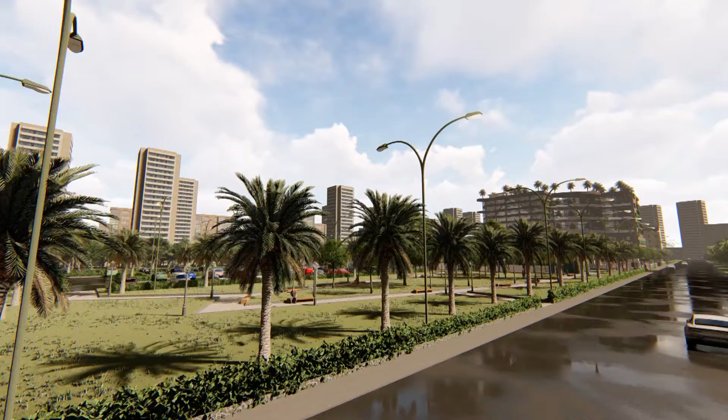My name is John Mikey A. Villanueva. I'm here to show to you my thesis presentation entitled Hope, a proposed Quezon City Cancer Medical Institute: Holistic approach through health and wellness therapies. A tertiary level hospital specializing in cancer healthcare. A research focus of a psychosocial-spatial integration of a healing, collaborative, and learning environment of a cancer institute.

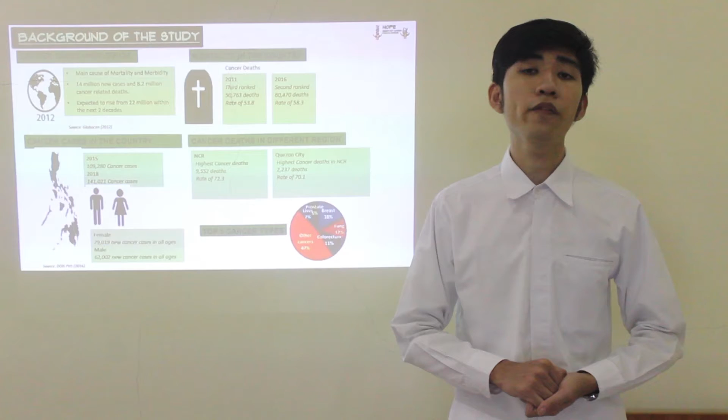Before we go on to the thesis proper, let's discuss the background of the study. Cancer cases worldwide are the main cause of mortality and morbidity, with a number of 14 million in 2012. In our country, cancer cases increased from 2015 to 2018 with a number of 141,021 cases. Female holds the highest number of cancer cases with 79,019, while for male it is 62,002. Moving to mortality, cancer death ranked third in 2011, increasing to second place with 60,470 deaths in 2016.

Cancer deaths in different regions: NCR hosts the highest cancer death among all cities and regions in the Philippines with a number of 9,552 deaths, and under NCR, Quezon City hosts the highest cancer death among all cities with a number of 2,237 deaths. Now for the top 5 cancer types.

Number 1 is breast, followed by lung. Third is colorectum. Fourth is liver. And the fifth one is prostate.

Next is the site of the project and its characteristics. The site is located along Barangay Pasong Putik, Novaliches, Quezon City, Metro Manila. It is an irregular lot with a total land area of 2.6 hectares, adjacent to 4 minor roads. The site is accessible via private and public vehicles such as buses, taxis, jeepneys, or even private cars.

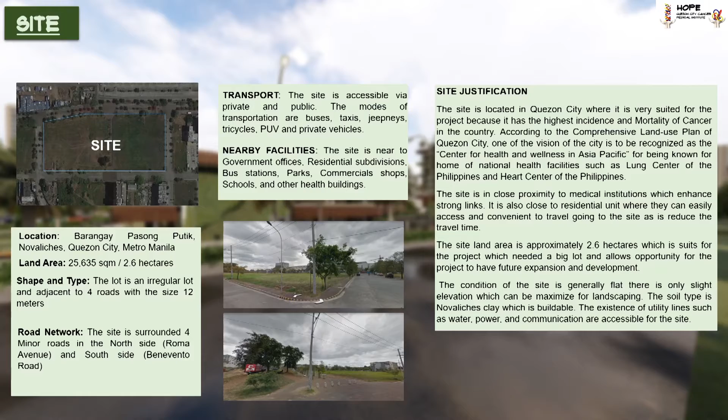The site is surrounded by businesses, residential subdivisions, parks, stations, commercial shops, and even schools. I therefore conclude that the site is very suited for this project since it's located in Quezon City, where it hosts the highest cancer cases and cancer deaths among all cities of the Philippines. It is also one of their main missions to be recognized as the Center for Health and Wellness in Asia Pacific.

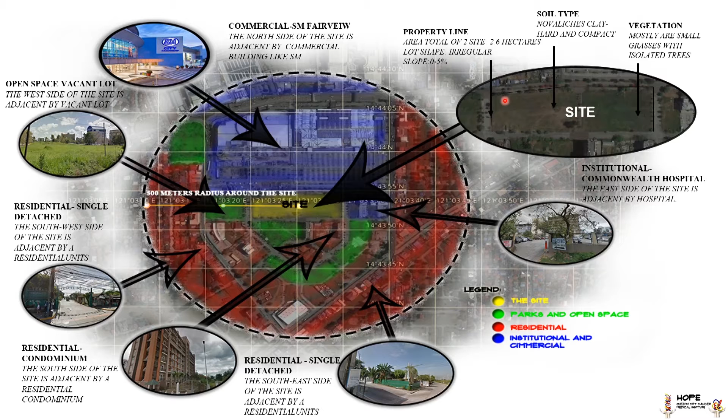The site's soil type is classified as Novaliches clay, which is hard and compact based on its characteristics. The vegetation of the site is composed of many small grasses and fewer trees, located beside the property line. The sloping of the site is 0 to 5% with the shape of an irregular lot.

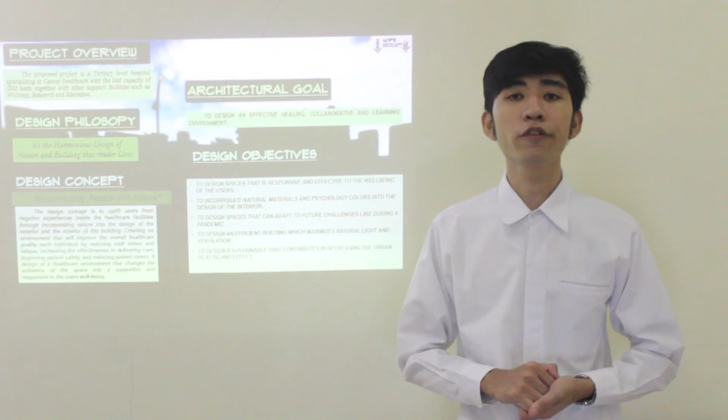Next will be the project overview and also the different ideas towards the design approach of the building. For the project overview, this project is a tertiary level hospital specializing in cancer healthcare with a total number of 200 beds capacity, supported with other facilities such as wellness, research, and education.

For the design philosophy, it's the harmonious design of nature and building that render lives. It means the combination of the building itself and nature will have to improve the quality of experience of the users inside the space.

Design concept: reconnecting people with nature. Knowing that healthcare and hospitals are considered one of the many environments that are stressful, this concept will assess and flip the users from negative experiences into a positive outcome through incorporating nature design throughout the exterior and interior of the building, creating an environment that will improve overall healthcare quality of each individual by reducing staff stress and fatigue, increasing effectiveness of delivering care, improving patient safety, and reducing patient stress—a design of space that will support and be responsive to the user's well-being.

For the architectural goal, it is to design an effective healing, collaborative, and learning environment. So for the design objectives: a design that is responsive and effective to the well-being of the users.

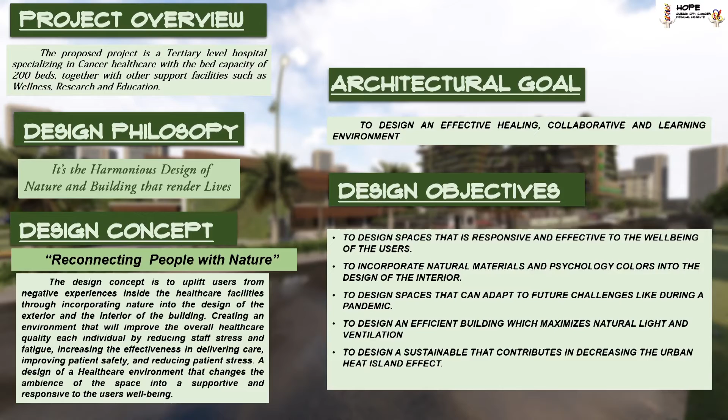Design consideration number one is the control circulation. A hospital is considered one of the most complex projects for having many different institutional and functional zoning.

Next is the safety and security. A design that can sustain such as typhoon, earthquakes, and fire, and also a provision of the Fire Code of the Philippines for having a safety and escape plan.

For accessibility, provision of BP 344, consideration of the accessibility law.

Next is the sustainability. A design that can decrease the heat island effect and can cleanse the air pollutant.

For the efficiency, a design that can maximize the use of daylighting and passive cooling that can decrease the consumption of energy. A design that can assess the current and future issues through incorporating flexible spaces that can adapt to future changes.

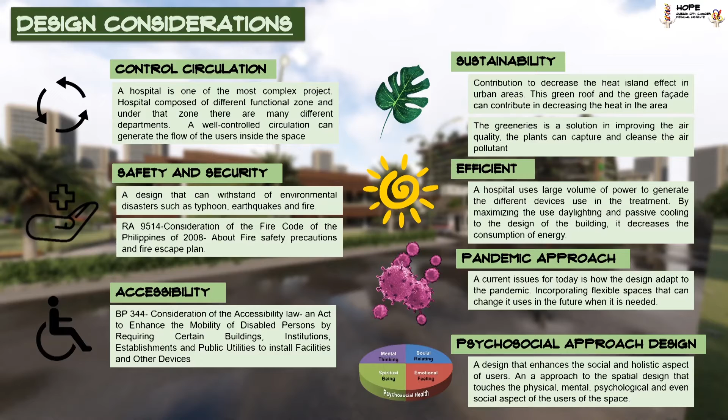A design of the space that targets and approaches the mental, social, spiritual, and emotional construct of each individual. A psychosocial spatial integration of a healing, collaborative, and learning environment of a cancer institute.

So what is psychosocial? It is the factors that influence the psychological and social construct of an individual person. Relating it to architecture, psychosocial-spatial is an approach to the design of spaces that supports and enhances their psychological and social well-being. So the diagram shows the four factors that affect the psychosocial.

So in the next slide, it shows the psychosocial design focus approach. Number one is the connection to nature. Having a water feature and a green feature for each floor will create an enhancement to the well-being of the users, as well as a home-like environment for the design of the interior, incorporating natural materials and the psychology of colors.

Next is the common spaces. Common spaces promote social life. It brings a sense of community and helping each other. These common spaces can also be used in future expansion or for other purposes.

Next is the aesthetic views coming from the exterior of the building. These green ledges show a good positive distraction to the user inside the interior.

Next is maximizing the use of natural light and fresh air, knowing that it is really helpful for the cancer patients and also for the staff to have enough natural light and fresh air to attain and enhance their well-being. Next is the control circulation, providing wood dividers and also the colors of the room for distinguishing the different functions of rooms.

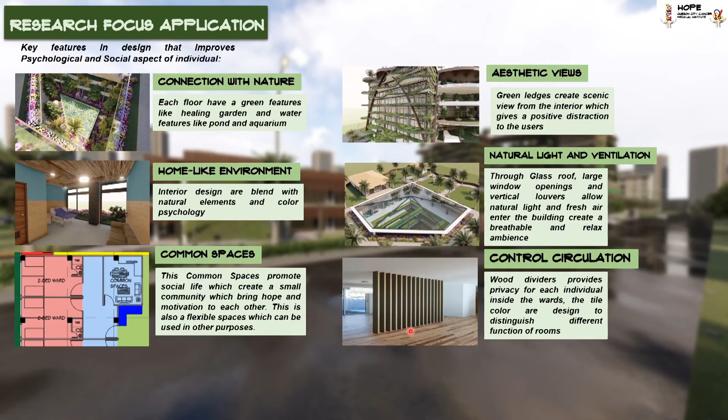Form concept. So the concept idea is to have a climate adaptive form that will utilize and maximize the use of daylighting and allow fresh air to enter upon the building, also canceling out the noise and the air pollutant coming from the exterior of the building.

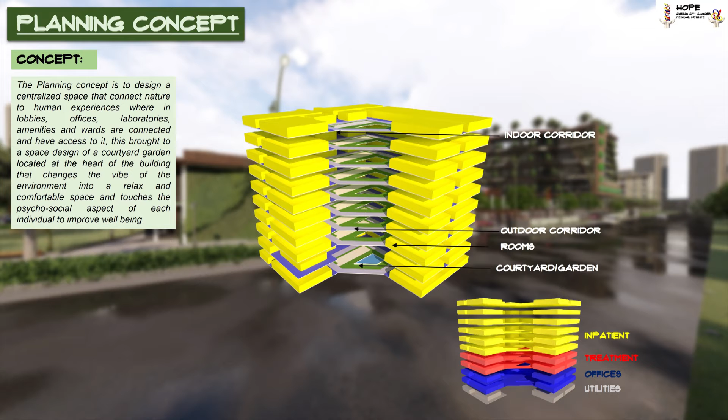Planning concept. The design idea of the plan is to provide each room access to nature. By providing a courtyard garden at the center of the building, each floor is designed to have access to nature, which stimulates the whole ambience of the building and creates a breathable, comfortable environment.

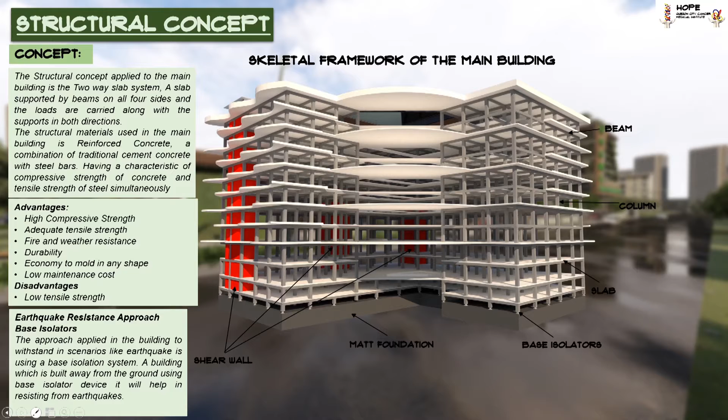For the structural concept, the structural system applied is the conventional two-way slab, supported by beams on all sides, using reinforced concrete as the main material. Its advantages include compressive strength, adequate tensile strength, good fire and weather resistance, good durability, and it's easy and economical to mold into any shape with low maintenance cost.

However, a disadvantage is low tensile strength, as concrete is known to be weak in earthquake resistance. So in my design, I incorporated a base isolator that helps separate ground movement from the building.

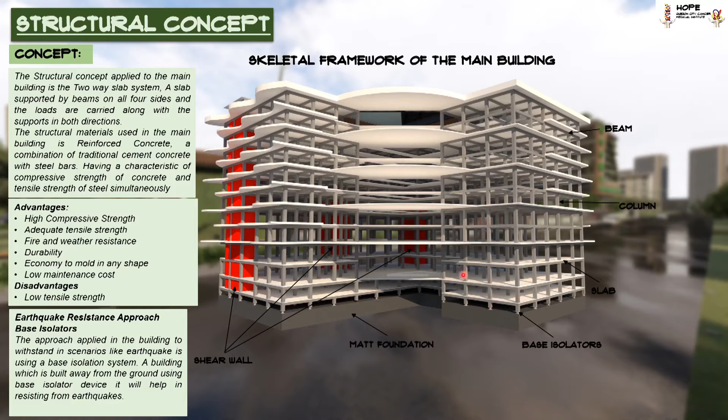As you can see in the slides, this is the 3D view, the skeletal framework of the main building. The red indicates the shear wall, the black indicates the Matt foundation, and here's the base isolator, showing where it's located relative to the slab, column, and beam.

Structural details, base section. The cutting section is on column A, showing the beam connection and also the green ledges from the footing up to the roof deck level.

Next is the spot details for base isolators. The base isolator has a total height of 600 millimeters, applicable to all columns in the building.

Next is the spot details for the green ledges, showing the different layers for the membrane, as well as the spot detail for the roof deck.

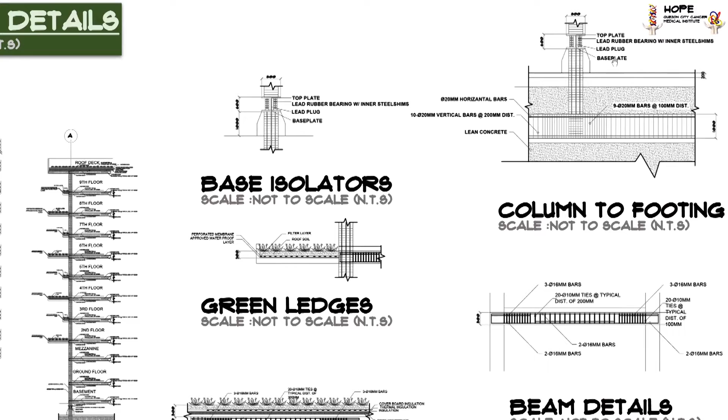Next is the detail of the column to footing, with a column size of 600 by 600 millimeters and a footing depth of 1 meter.

Next is the spot detail of the beam. The dimension of the beam is 300 by 600.

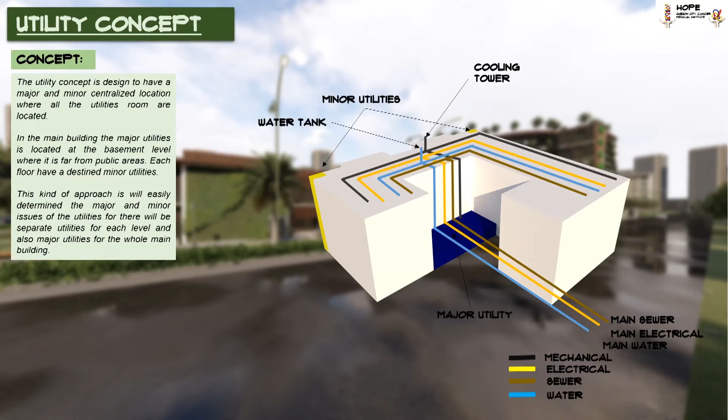Next is the utility concept. The blue color indicates the water line, the black indicates the mechanical line, the yellow indicates the electrical line, and the brown indicates the sewer line. It is tapped from the main to the building's main utility and circulates throughout the building. There are also minor utilities which control utilities per floor, located at each floor on the corner side of the building.

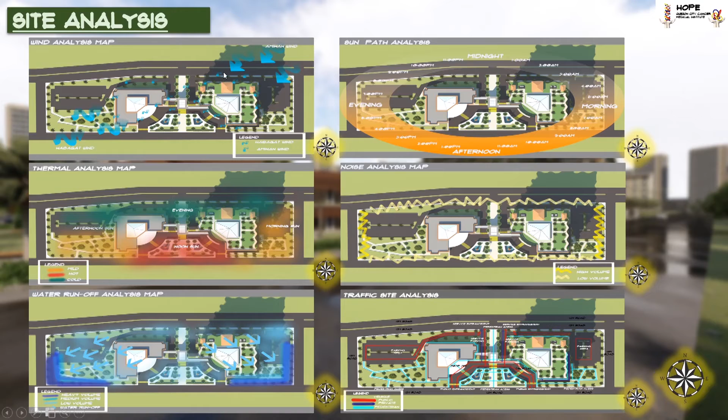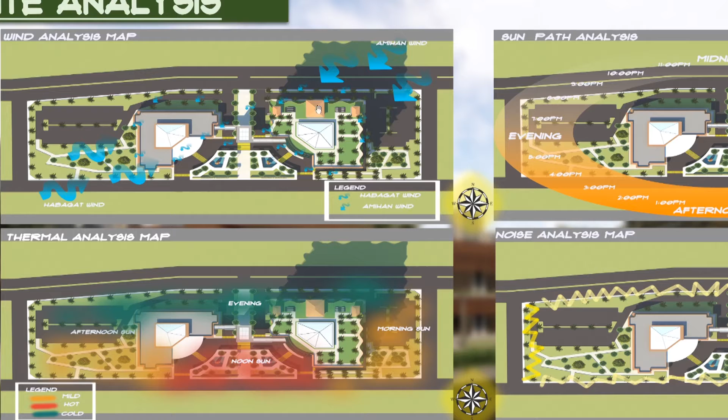Next is the site analysis, starting with the wind analysis map. The Amihan wind comes from the upper right portion of the site, where the hospital and wellness building is located, while the Habagat wind comes from the lower left portion, where the research and education building is located. The orientation of the buildings is designed to capture more fresh air into the interior.

Next is the sunpath analysis. The hospital and wellness building is located where the sun rises, maximizing the use of natural light for the well-being of users and for daylighting.

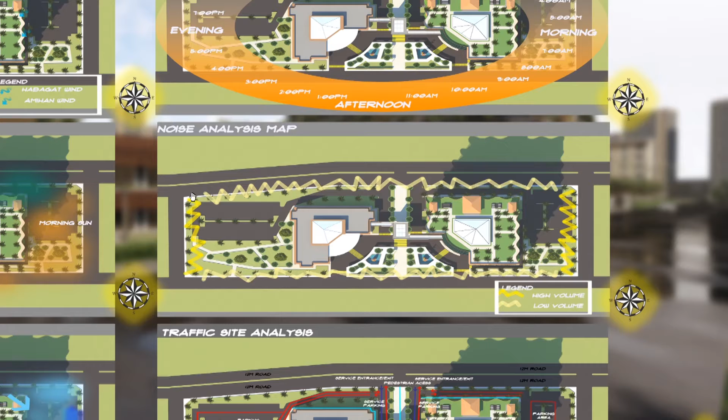Next is the noise analysis map. Most of the high volume sounds are located at the east side and west side of the site, which is why the building is located at the center, far from the noise.

Next is the thermal analysis. The hottest portion of the site is located at the south side, while the coldest portion of the site is located at the north side. It is where most of the wards are located to attain a comfortable temperature of the interior.

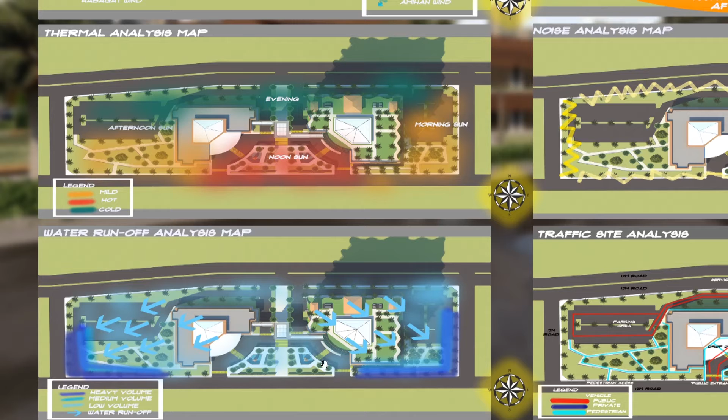Next is the water runoff analysis. Water runoff towards the southeast of the site and also towards the southwest of the site, which are the lower levels of the site. The pink line indicates the vehicle path of the emergency.

The red line indicates for the public. The violet indicates for the private. And the blue indicates for the pedestrian path.

The main entry point for going in the hospital and research is here. The main entry point for the research and education is here. The service entry point and exit are located here. For the research and education, for the hospital and wellness are located here. The parking area for research and education are located here. Parking area for wellness and hospital are located here.

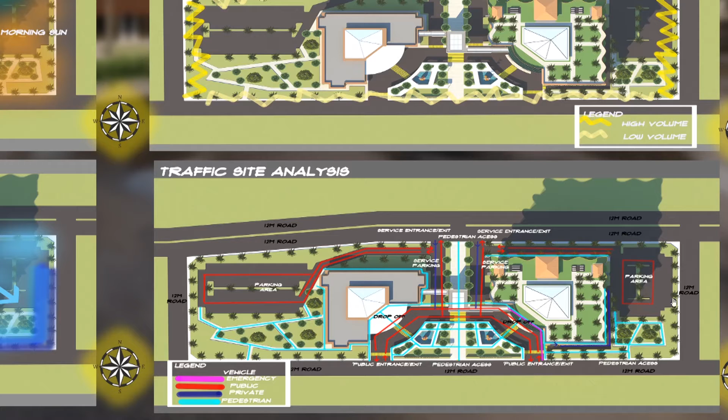The pedestrian access are located here at the center of the site, and also the right side of the site, and also to the left side of the site.

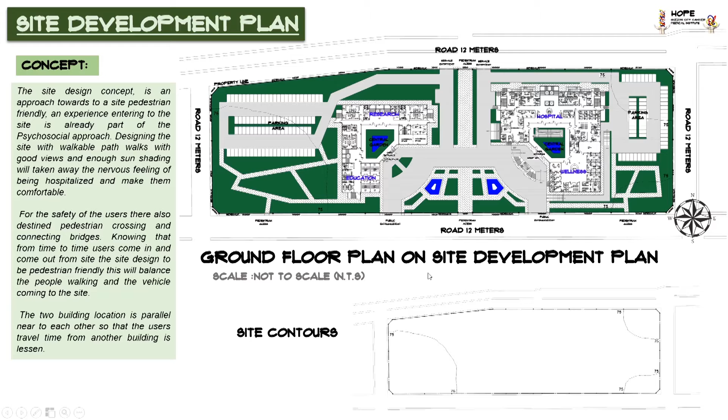Here showing to you the ground floor on-site development plan and also the site contour with the elevation of 75 meters. Next, we go on to the site development plan, showing the roofs.

The location of the two buildings is parallel and near to each other to cut off the travel time from transferring to another building. The number of parking spaces for research and education are 89. The number of the parking spaces for the hospital and wellness are 55.

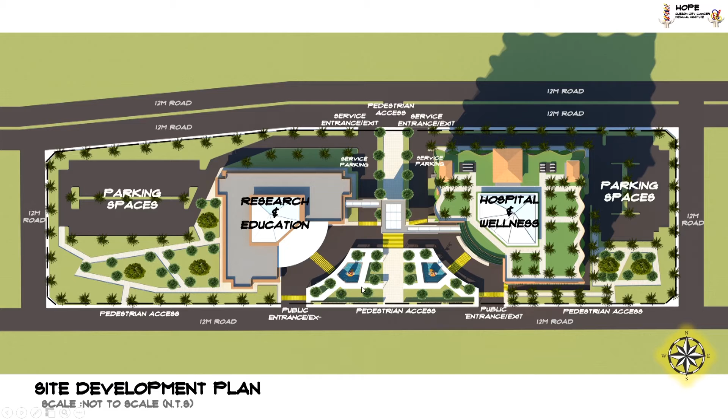The road that are parallel in the south side of the building is a 12-meter two-way road. The taxi bays are located at the middle portion of the site where the pedestrian access are located. The sizes of the open pathwalks and covered pathways are 3 meters with the provision of benches.

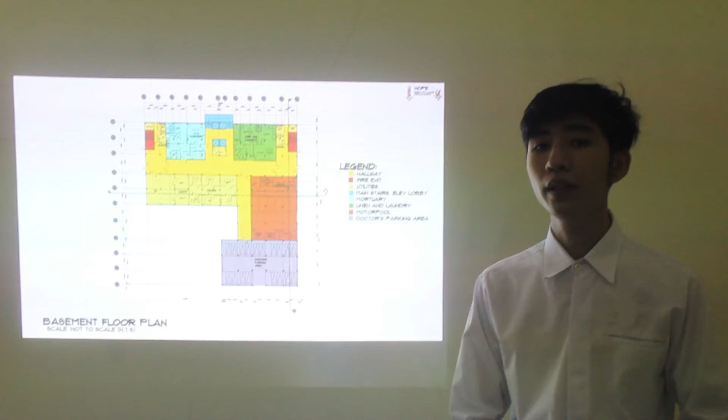So next will be the architectural drawings, the plans, the elevation, the section of the main building, which is the hospital and wellness. This is the basement floor plan.

There are 3 entry points. First entry point are located near the doctor's parking area. Second entry point are near the right fire exit. Third entry point are located near at the left fire exit.

The sizes of the corridors and hallways are 6 meters wide. The main utilities are located here, as well as the waste room.

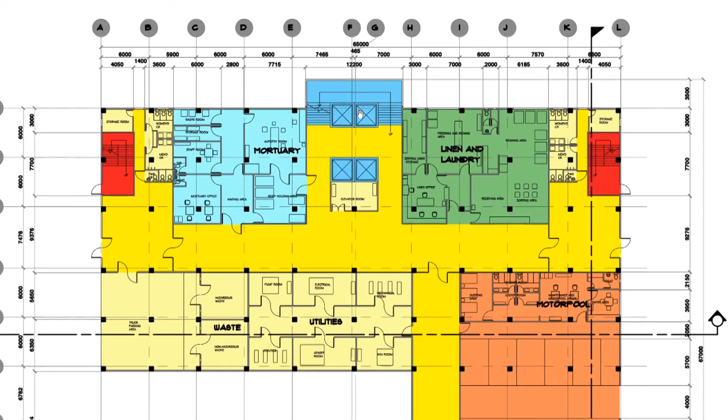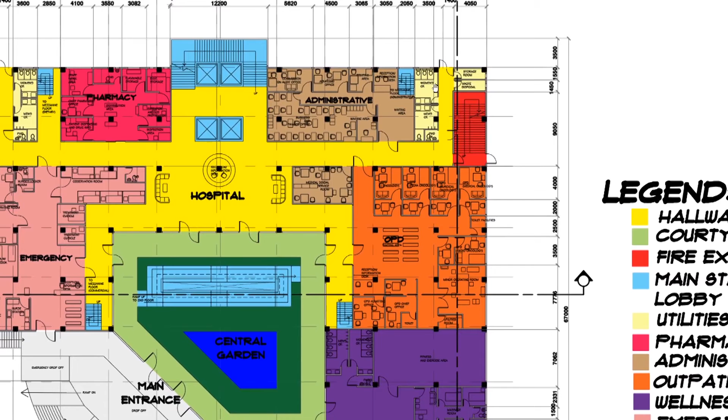There are 3 main entry points. First main entry point are located in the main entrance. The second one are located at the back side near the right fire exit. The third one are located at the back side also near the left fire exit.

This is the courtyard garden with the provision of the service ramp from ground floor to the 9th floor. This is the main stairs, and this is the hospital lobby, and this is the wellness lobby.

The sizes of the corridors are 3 meters wide. These stairs are going to the mezzanine level.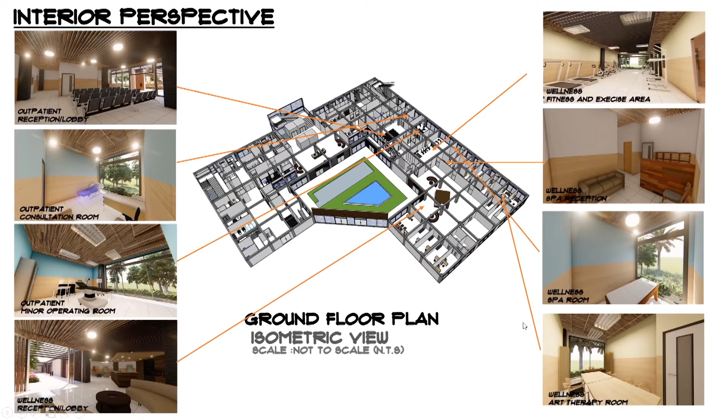This is the mezzanine floor plan. This is the dining hall of the dietary. This is the commercial shops and cafeterias.

These stairs are going to the ground floor. This is the second part of the administrative. And this is the doctor's residences. And this is the lobby for the doctor's residences.

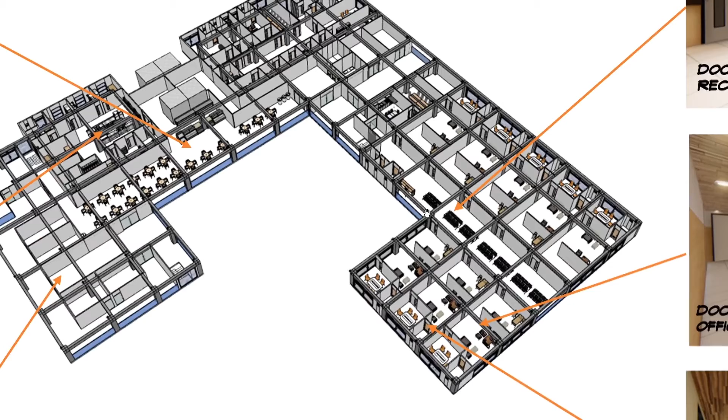This is the isometric view of the mezzanine floor plan. And these are the interior perspectives.

This is the second floor plan. This is the courtyard garden, the provision of the service ramp.

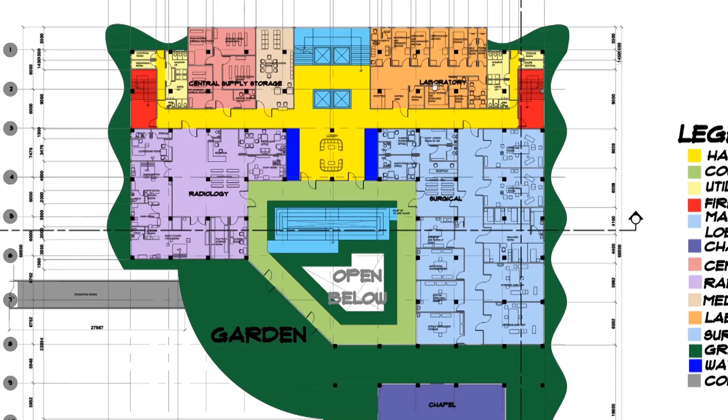This is the garden balcony with the chapel. This is the hospital second floor lobby. This is the main stairs and elevator. This is the radiology department. This is the surgical department, the laboratory department, the central supply storage and medical records room. And this is the connecting bridge from the hospital to research.

The sizes of the corridors are 3 meters wide. This is the isometric view of the second floor plan. These are the interior perspectives.

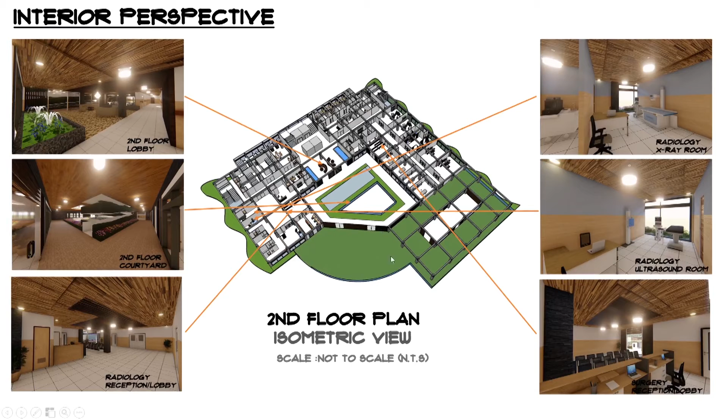This is the third floor plan. This is the courtyard garden with the service ramp. This is the open below from the second floor plan level. This is the radiotherapy department. This is the chemotherapy treatment bays, the chemotherapy isolated room, and the chemotherapy or pediatric oncology. This is the hospital third floor lobby, the main stairs.

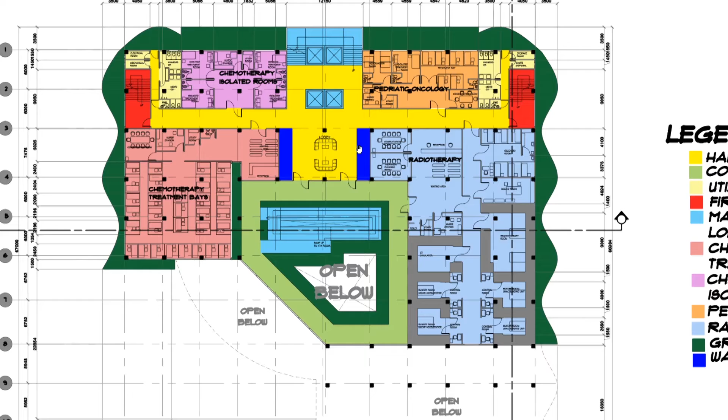The sizes of the corridors are 3 meters wide. This is the isometric view of the third floor plan. These are the interior perspective.

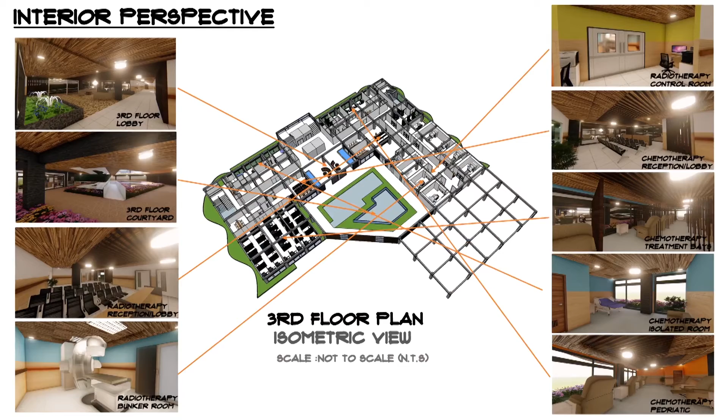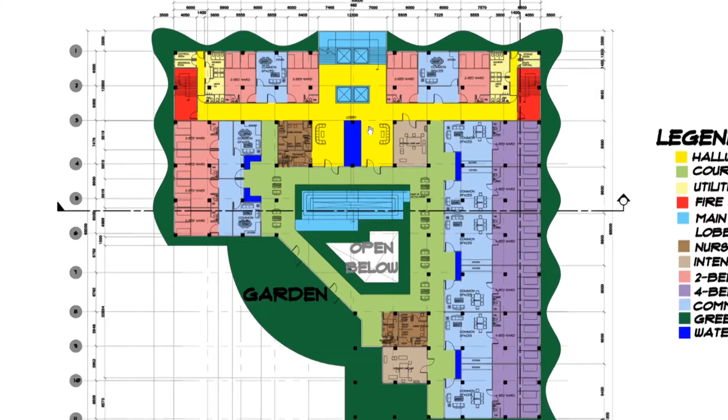The 6th floor plan. This is the 6th floor plan hospital lobby. This is the courtyard garden with the provision of service ramp. This is the garden balcony. There are 2 nurse stations and 2 intensive care units. This is the 2-bed ward with adjacent common spaces. This is the 4-bed wards with adjacent common spaces.

The sizes of the corridors are 3 meters wide. These were the main stairs and 2 fire exits. This is the isometric view of the 6th floor plan. And these are the interior perspectives.

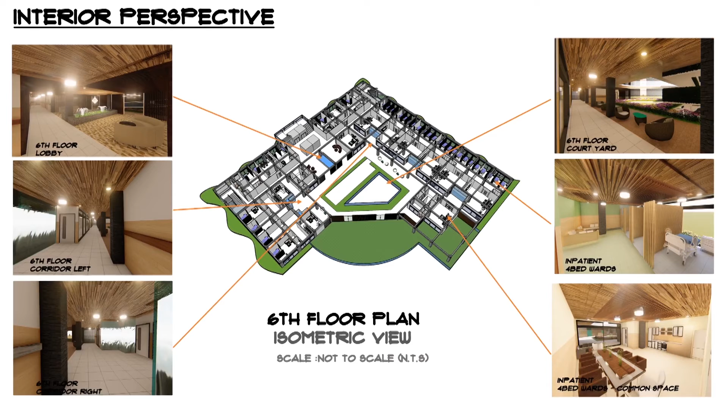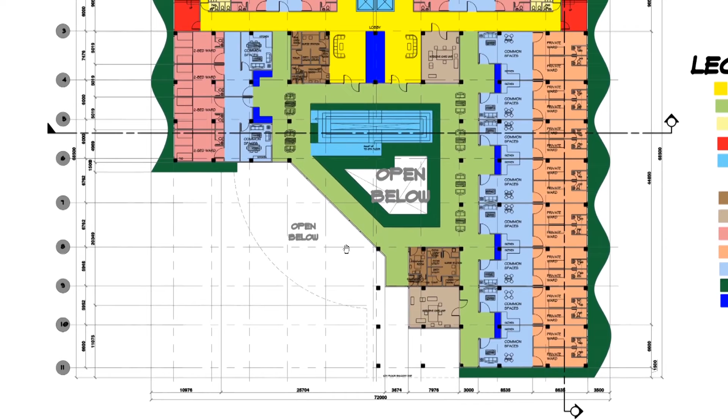This is the 7th floor plan. This is the 7th floor plan hospital lobby. This is the main stairs. There are 2 nurse stations and 2 intensive care units. This is the courtyard garden, a provision of service ramp. This is an open below with a view from the 6th floor balcony line.

This is the 2-bed ward with adjacent common spaces. This is the private ward with adjacent common spaces. The 7th floor plan. These are the interior perspectives.

This is the 8th floor plan. This is the balcony garden. This is the courtyard garden with a service ramp. There are 2 nurse stations and 2 intensive care units. This is the hospital 8th floor lobby. This is where the deluxe room.

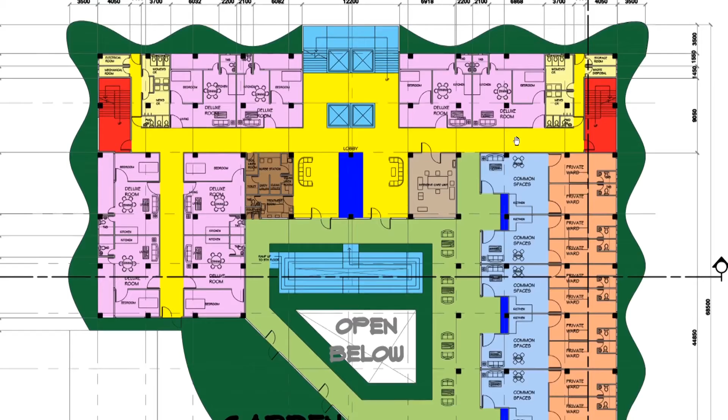This is the private ward with common spaces. This is the main stairs. This is the isometric view of the 8th floor plan. And these are the interior perspectives.

This is the 9th floor plan. This is the courtyard garden with a service ramp going to the 8th floor. This is an open below, a view from the 8th floor plan garden balcony. There are 2 nurse stations. There are also 2 intensive care units. This is the private ward with shared common spaces.

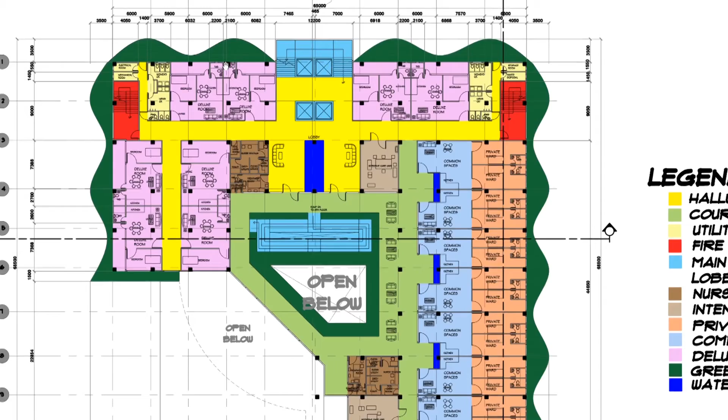These are the deluxe room. These are the main stairs. The sizes of the corridors and hallways are 3 meters wide. This is the isometric view of the 9th floor plan. These are the interior perspectives.

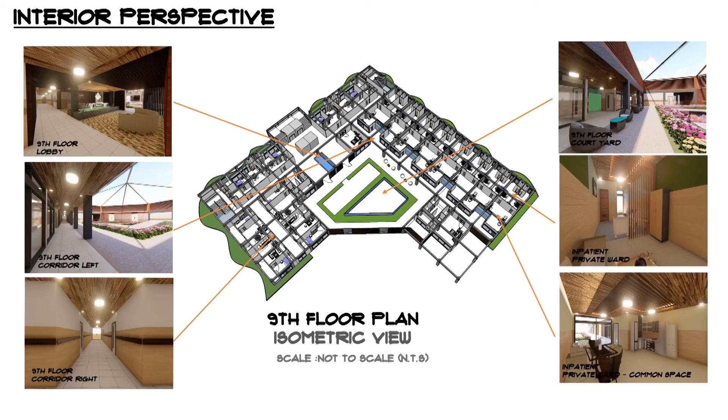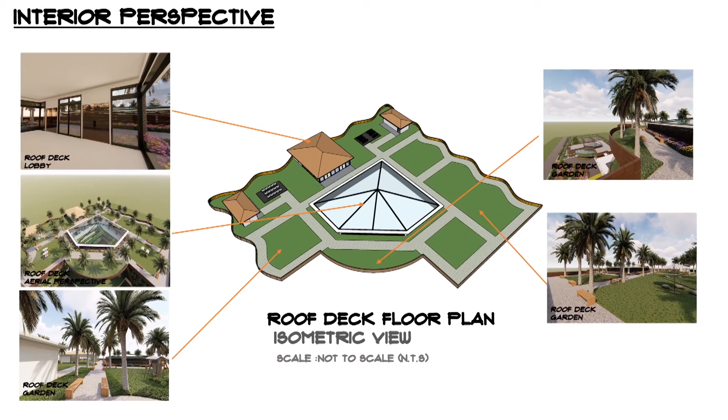So these are the sections of the hospital and wellness building. The height from the basement floor line to the apex of the building is 43.2 meters. This is the cross section, and this is the longitudinal section.

Next, the architectural drawing of the secondary building, which is the research and education building, showing the plans, the elevation, the section, and also the interior perspective.

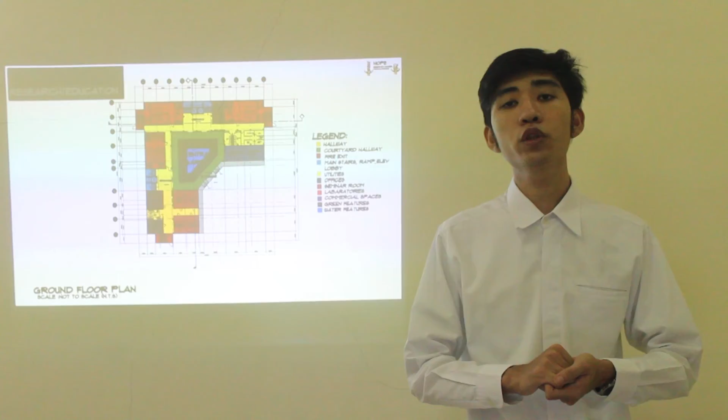This is the ground floor plan of the research and education building. This is the main drop-off. This is the main entry point with the provision of the courtyard garden.

This is the main stairs and elevator for the education department, and this is the main stairs and elevator for the research department. This is the reception lobby of the education side, and this is the reception lobby for the research side.

The sizes of the corridors and hallways are 3 meters wide. This is the commercial spaces, and this is the main utilities. These are the typical laboratories for wet and dry laboratories.

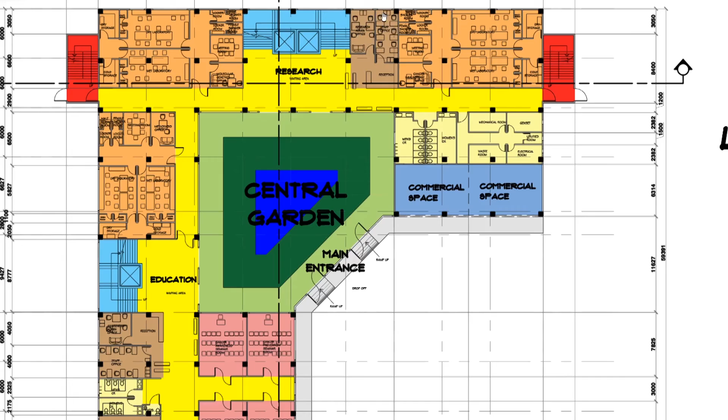These are the main offices for research, admin office, and staff office. And this is for the education side, staff office, and admin office. This is the isometric view of the ground floor plan.

And these are the interior perspectives.

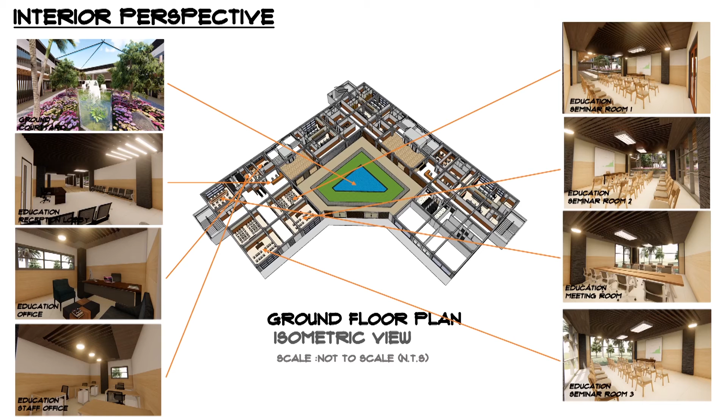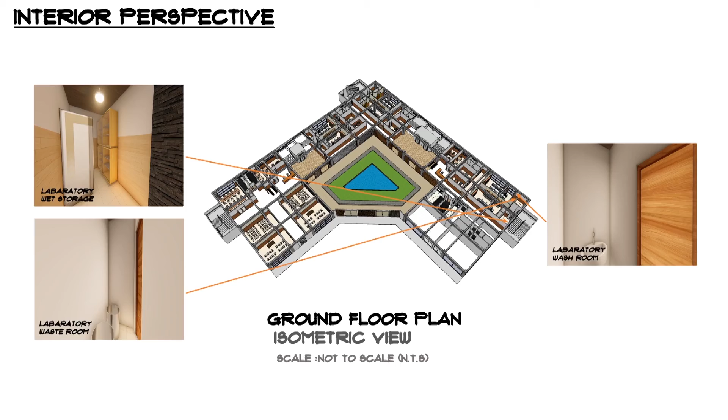This is the second floor plan. This is the balcony garden with the provision of the connecting bridge going to the hospital. This is the ramp. This is the stairs.

So this is the outer corridor with a view from the ground of the courtyard. This is the education lobby of the second floor. This is the research lobby of the second floor.

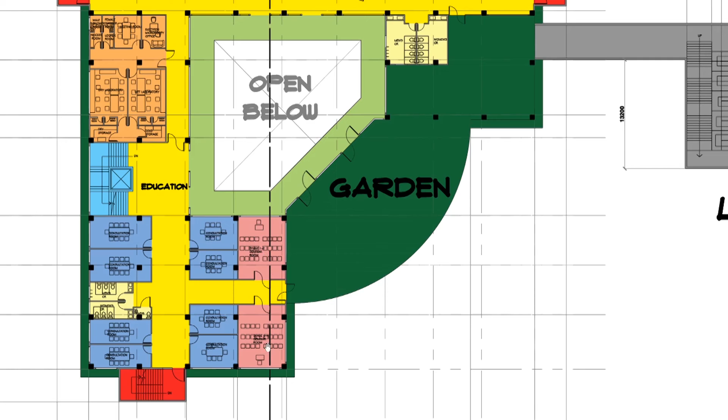These were the typical laboratories for wet laboratories and dry laboratories. This is where the consultation room for the education side, the small consultation room, and the 2 seminar rooms. The sizes of the corridors and hallways at the second floor are also 3 meters wide.

This is the isometric view of the second floor plan. And these are the interior perspectives.

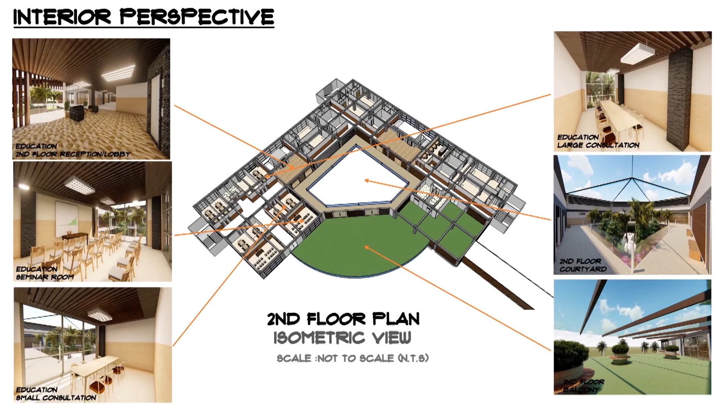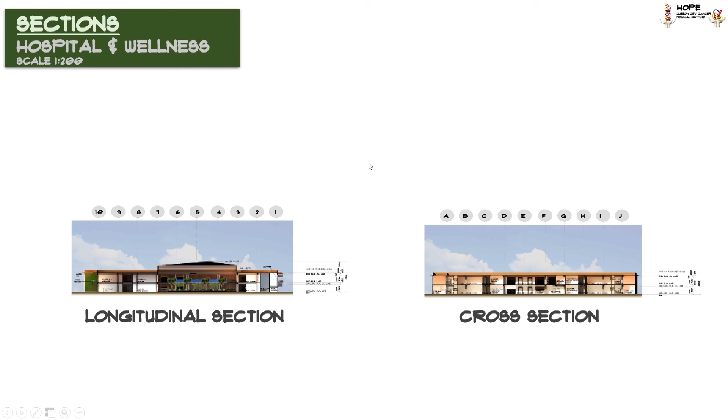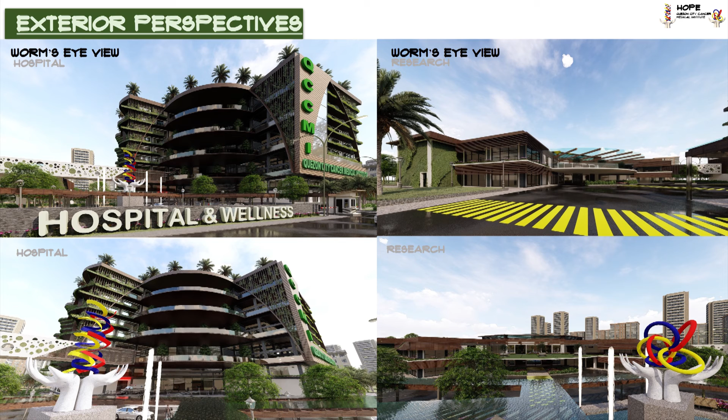to bird's eye view. These are the interior perspectives. This is the hospital's worm's eye view, and this is the research building's worm's eye view. Another view from the hospital, and also another view from the research building.

The meaning of the statue in front of the hospital: the ribbon is the symbol of cancer, and the hand symbolizes care. The color of the ribbon is part of the Philippine flag, meaning this hospital building is a symbol of cancer care.

The statue in front of the research building: the circle represents the cancer cells, and the hand also represents care. The color also represents the Philippine flag, meaning the care for the study of cancer.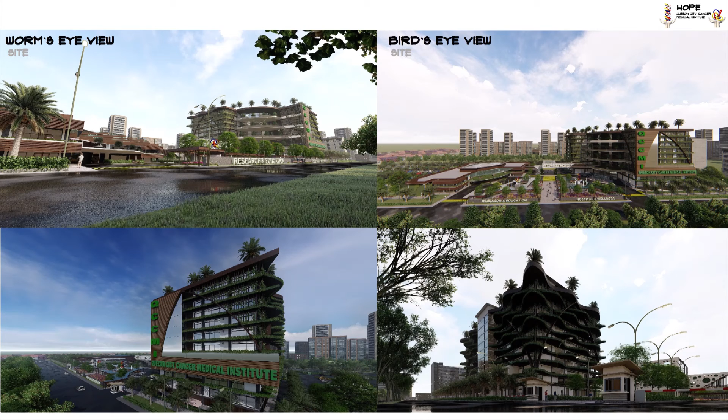Another example of perspective: the site's worm's eye view, the site's bird's eye view, another view of the perspective of the main building, and the rear view of the perspective of the main building.

Lastly is the breakdown of the feasibility study. So these are the breakdown of the feasibility study.

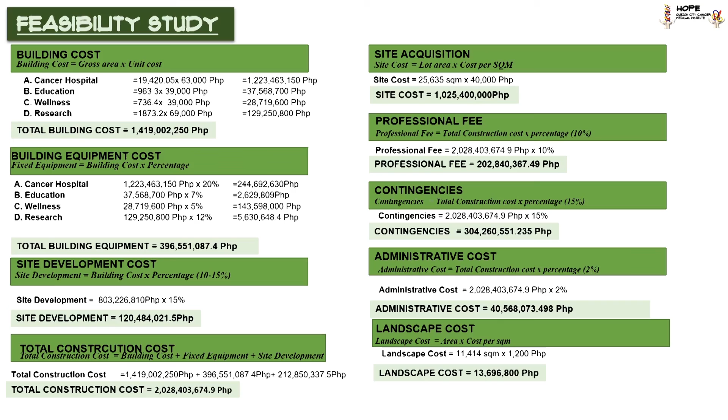The total building cost is 1,419,002,250. The total construction cost is 2,028,403,674.9 pesos. The total budget required is 3,615,169,467.123 pesos.

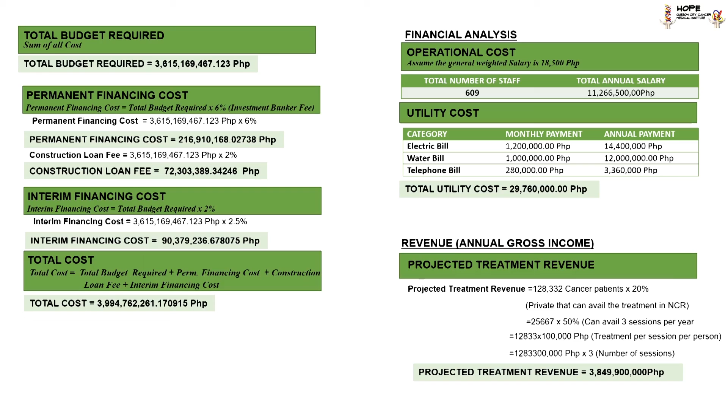The project treatment revenue is 3,849,900,000 pesos. The project treatment revenue from patient bed is 346,320,000 pesos. The projected revenue from integrated services and other facilities is 25,344,000 pesos. The projected revenue from operating the emergency room is 717,600,000 pesos. The projected revenue from doctors' offices is 6,480,000 pesos.

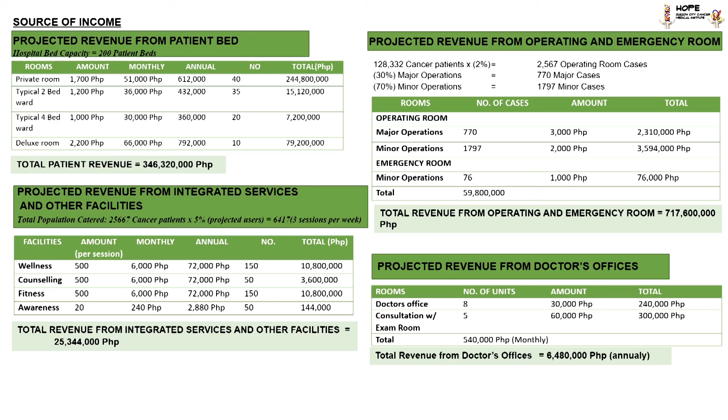So for the total income, it is 4,145,644,000 pesos. So for the breakdown of the return of investment, it is equal to 2.71, or almost 3 years.